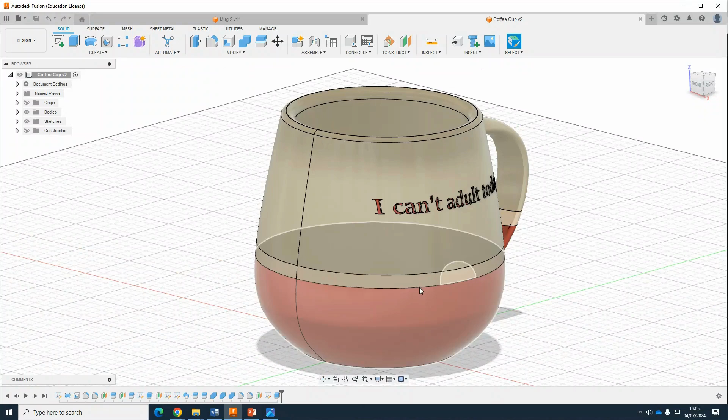So this was the original mug that I created, and this is where I got up to on the previous tutorial. As you can see, this mug is broken down into 3 separate bodies, and that enabled me to render it in different colours like so.

So to do that I need to split some bodies. We're going to go into Construct, Offset Plane, select the bottom face or bottom plane, and drag it up 60 millimeters. In fact, I think it's 50.

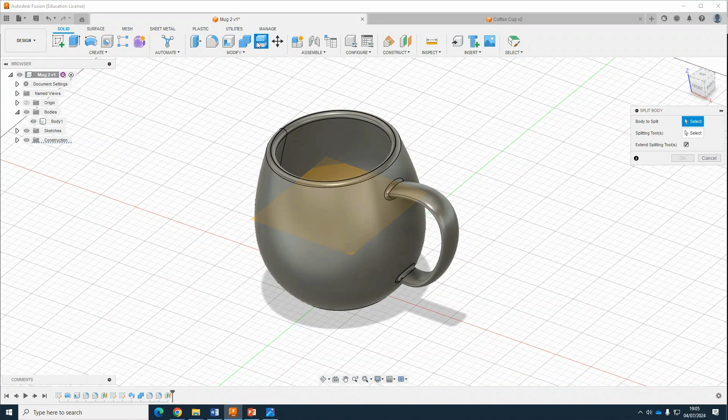And then I'm going to go to Split Body, select the body. Then it wants me to select a splitting tool. In this case, we're going to use that work plane. Click OK, and now I've broken that down into 2 bodies.

I'm going to repeat that. I'm going to go up 5 millimeters. In this case, it's -5 to take it up.

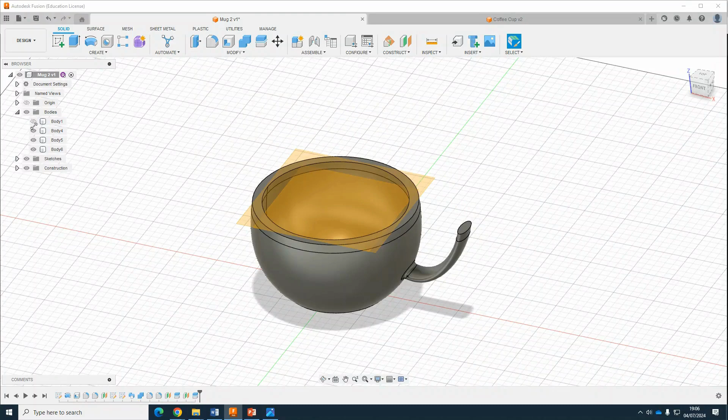Split Body, select the top body, select that new work plane. Okay, and there we go. We've split that body into several different bodies. So we've probably got a little bit for the handle separate now. Yeah.

Right, so now I'm going to turn these work planes off because they're ugly and they're getting in the way. And now I can go over into the render tab.

I'll change my background colour to this - that's going to change it darker, I'll explain why in a second. Click OK on that, close the background settings, and then go into the appearance library.

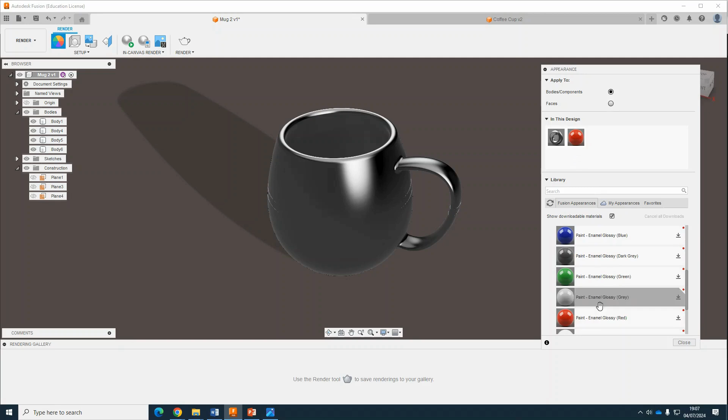We can select anything for this. I don't know if I want glass, so let's have a look. I'm going to go for paint - glossy paint. In the glossy paint I can choose some of these colors, so I'm going to choose red, white, blue.

And now because I've got the body selected here, I can drag that over. Make that a white one. Drag that to the top.

If I'm not entirely happy with these colors, I can double click on the sphere in there and actually manipulate the color slightly here, so whatever I would like it to be.

So close that. Now I've broken it down into 3 different parts with different colors. We go back into the design tab.

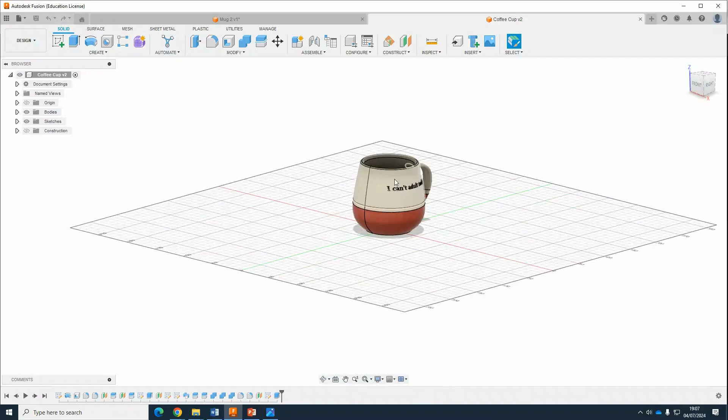I'm going to show you what this little disc is here - it's a little cheat. So I'm going to offset plane. It doesn't really matter where from, but I'm going to drag it high up.

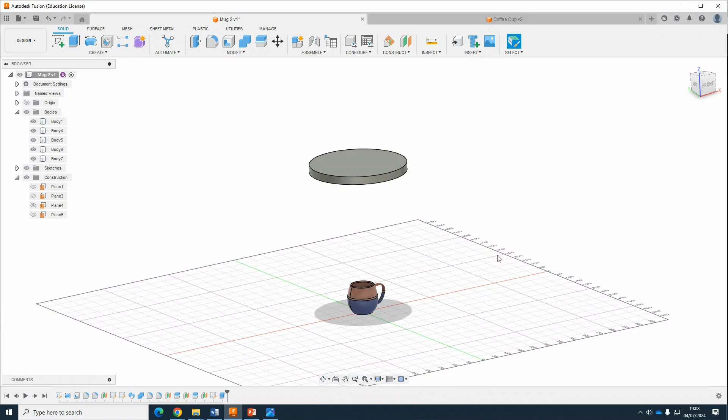Sketch onto there. I'm going to go for a circle - that's a circle. Extrude it. It's a bit big, I could probably make that a bit smaller, but we'll work with that for now.

We go back into render, appearance library, and I'm going to search LED. And there are 27 different LEDs here, so I'm going to go for this one.

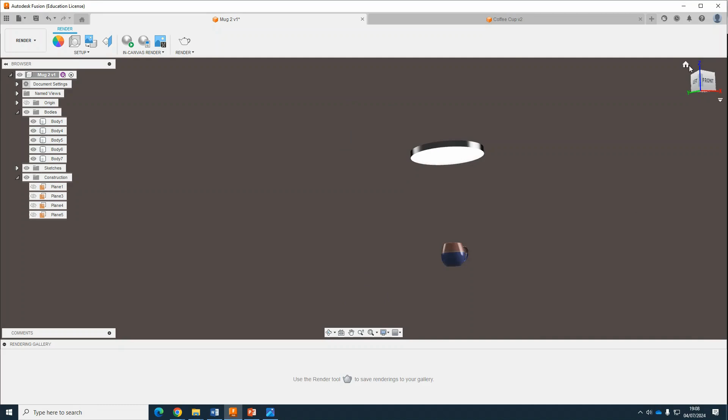I'm going to drag it up, look underneath, select the face, and turn that face into an LED light. So now, if I go back to home view, I'm going to zoom in and rotate it so I can't see that LED light I've just created in Canvas Render.

And it's now shining a super bright light on it. I can adjust the brightness of this light.

If I double click on that icon, go to Advanced, go to Emissivity, and I can turn the luminance up or down depending on what I want to do. See, that's too far down. There we go, apply.

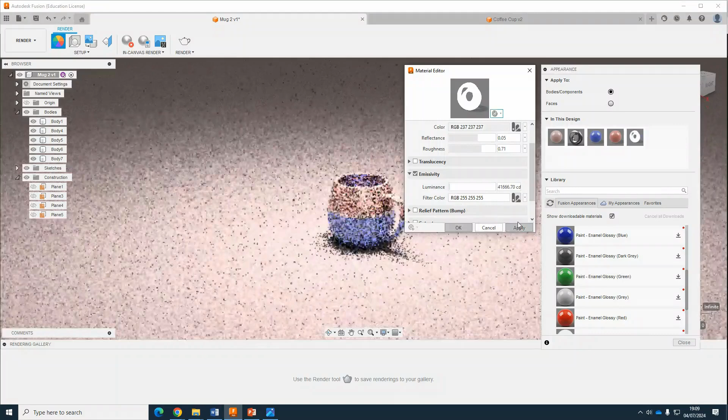Close that, we'll pause that. I'm going to go back to the Design tab. Select this body, right click, click Move.

And what I'm going to do, again just being clumsy, is drag it to the side and rotate it around, and it will cast a side shadow now.

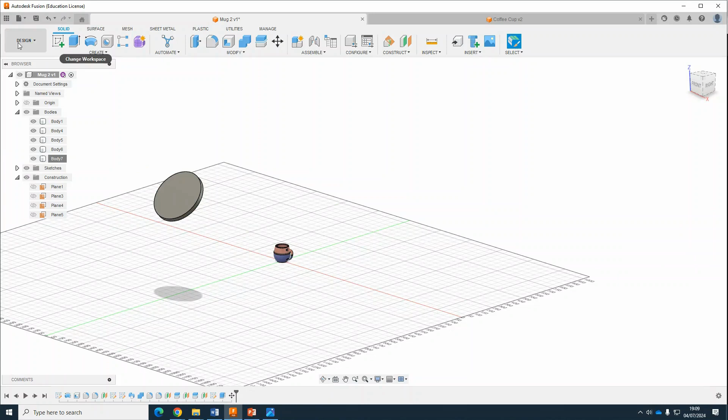Back to render, zoom in, In-Canvas Render. And we've started to change the appearance there a little bit.

I'm not sure about the background colour, so I'm going to play around with that slightly. There we go.